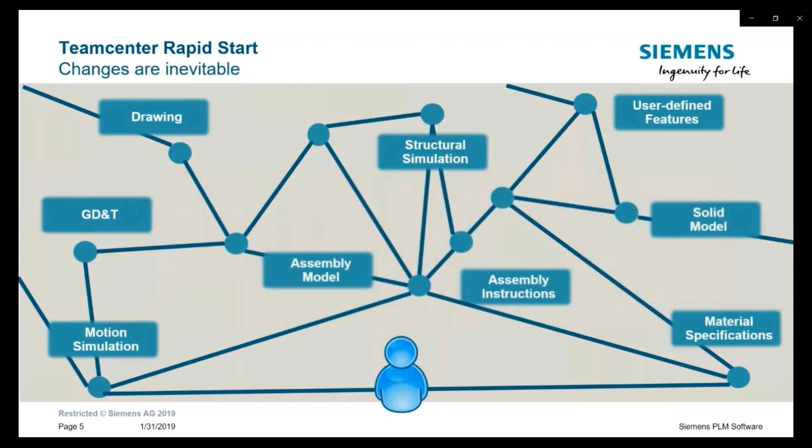Now, on top of that, change happens. The customer changes the requirements, or there's analysis that comes back and you have to change your models, but there's always change that's occurring.

Now, all of that data is interconnected, so when the change occurs, it's not good enough just to find that single piece of data that has to be changed. We really need to understand what the change will affect upstream and downstream. Otherwise, we may not see the whole picture, and making a small change can have a huge impact.

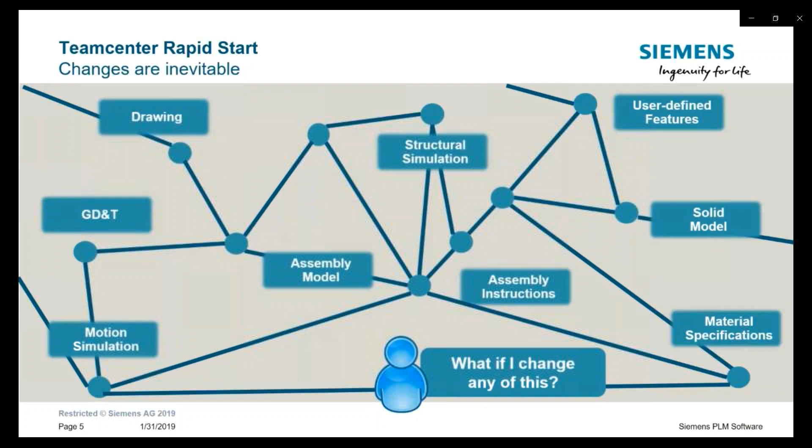That impact can cost a lot of money, and if the proper changes aren't handled efficiently or in the way that they need to be handled, it can hurt you on the bottom end. So we need to have this interconnected structure that allows us to be able to find all the affected documents. And Teamcenter manages that environment very, very well.

So by using the powerful search capabilities of Teamcenter, I can easily and quickly find my data, the exact data that I need. And I can also understand and see all the relational links of one piece of data to the other pieces. So this way I understand and have visibility to the entire breadth of data that defines my product or item.

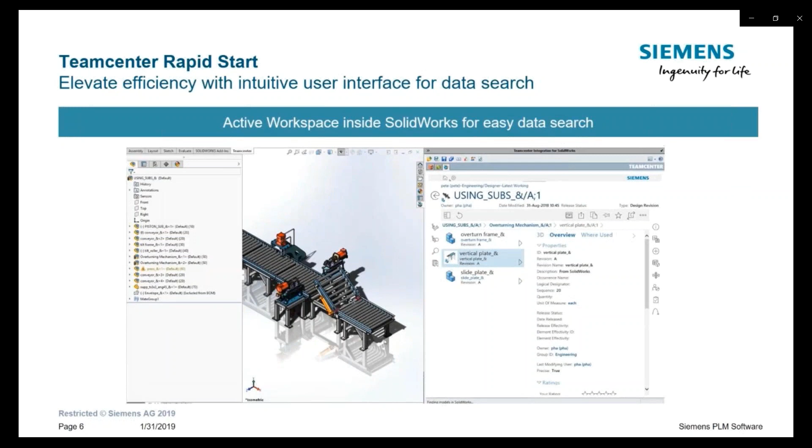In this next section, I'll discuss how you'll be able to stay in your CAD or Office tools in which you're comfortable working while still getting the benefits of Teamcenter Rapid Start. By doing this, this will result in an increase in productivity in the company by giving users direct access to the power and benefits of managed data via Teamcenter without having to switch between various software platforms.

So Teamcenter Rapid Start uses the standard Teamcenter integration for SolidWorks, which allows you to reduce product development cycle time and cost by enhancing your SolidWorks environment to deliver a single source of product data for your design and manufacturing teams. The integration provides access to a full range of PDM capabilities to help ensure that the right people get the right information at the right time.

Now, using Teamcenter Active Workspace, users can easily access PLM functions such as search and reuse, structured workflows, change management processes, design relationships, and more from within the native CAD authoring environment.

To help maximize designer productivity, the integration enables designers to create, save, search, and edit SolidWorks objects, including drawings, parts, and assemblies. Users can selectively update in-session models to later versions or revisions without reloading their entire assembly. During the design process, the Rapid Start environment tracks and manages the creation of new product revisions or versions, and updates that work in progress as well.

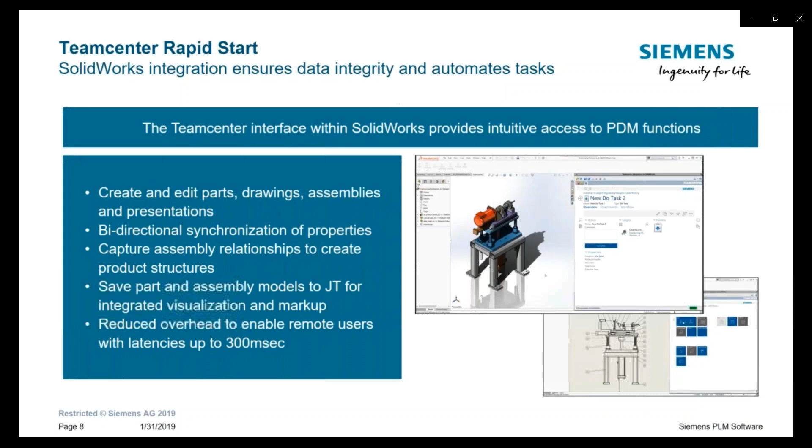In addition, Office tools are also tightly integrated with Teamcenter. There is a Teamcenter toolbar right inside of all the Office tools that is extremely intuitive, with commands like open, save, revise, and other operations.

This is the great thing about the integration: you can just open Word or Excel as you normally would, and then save to the secure Teamcenter encrypted volume instead of saving to a network or local drive, where you run the risk of losing that data the next time you go to look for it. This immediately puts your documentation into the managed environment where you can take advantage of workflows or other benefits that Teamcenter provides.

Teamcenter is tightly integrated into all the major mechanical and electrical CAD players, along with various ERP systems and other systems. Users can be comfortable in the system they are accustomed to working in and still get the benefits of Teamcenter.

This is a quote from the PLM manager at Briggs & Stratton. He basically says that Teamcenter is an advanced data management tool, much more advanced than anything SolidWorks users would be used to in that SolidWorks world. But at the same time, it's very easy to use because it's embedded right within SolidWorks, so they can get to it very easily. They stay in the tool they're familiar with, doing the SolidWorks CAD design changes they know how to do, but they get the benefit of having Teamcenter on the back end.

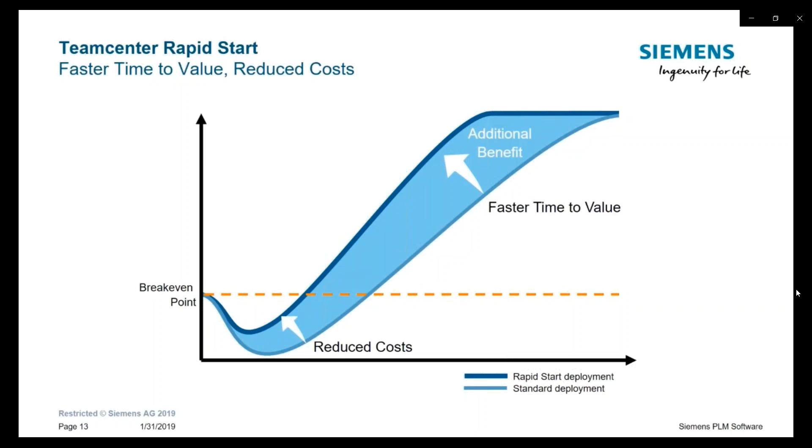The payback is based on a McKinsey report that states people basically spend about 2 hours on average a day just looking for data. That may be going out to a network drive or a local drive, trying to find that file. I think we've all experienced it: I know the file exists, but where did I put it? At the same time, within engineering groups, we typically see multiple copies of that file, maybe on the server, maybe on workstations, and then it becomes an issue of which of these is really the correct version to work with.

In this particular case, or in most Teamcenter quick deployment cases, we're looking at an implementation that is a smaller business install of Teamcenter Rapid Start. We give you lots of different options for that implementation. There are on-site and cloud-based options that change this formula, but you can rebalance that front-end cost and very quickly see what that is.

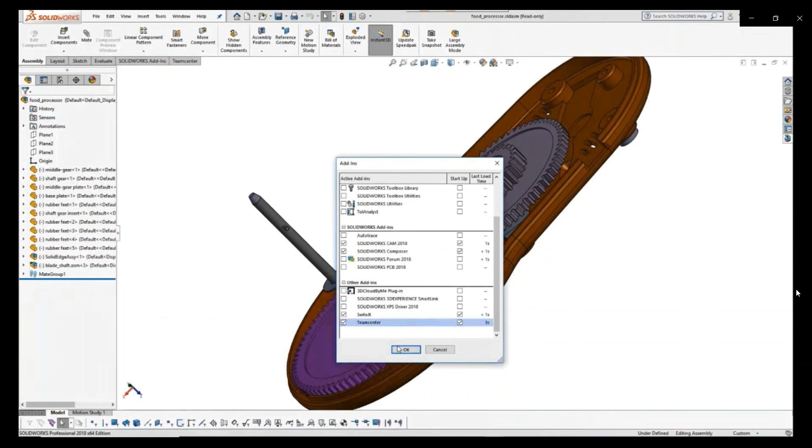Teamcenter can be installed just using the add-in tools. Once Teamcenter gets installed, you'll be presented with an icon on the right toolbar that gives you access to the active model in session. You can also look at what is in the cache and say, show me only the items in cache that are displayed on my screen. You can also see what's checked out to you as a user.

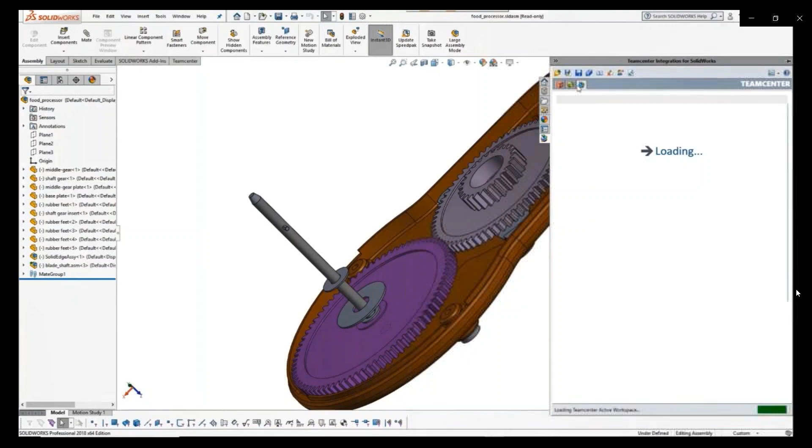From there, I can also get access into the active Workspace interface, which is embedded inside of the SolidWorks product. So I have full access to Teamcenter. I also get a pull-down menu, which gives me access to Teamcenter functionality as well.

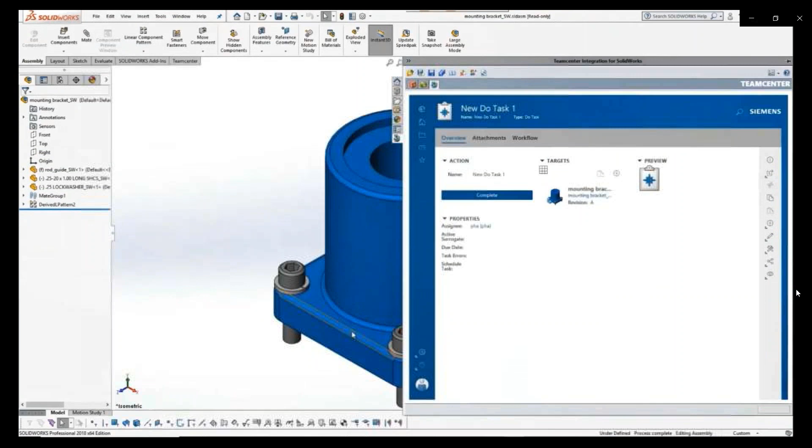Now in this example, Teamcenter can drive tasks to the user. So in this case, the user has been assigned a task. He can immediately see what that task is inside the SolidWorks product, open the affected assembly or parts or whatever needs to change, and then begin working, making the changes that have been requested of him off that task.

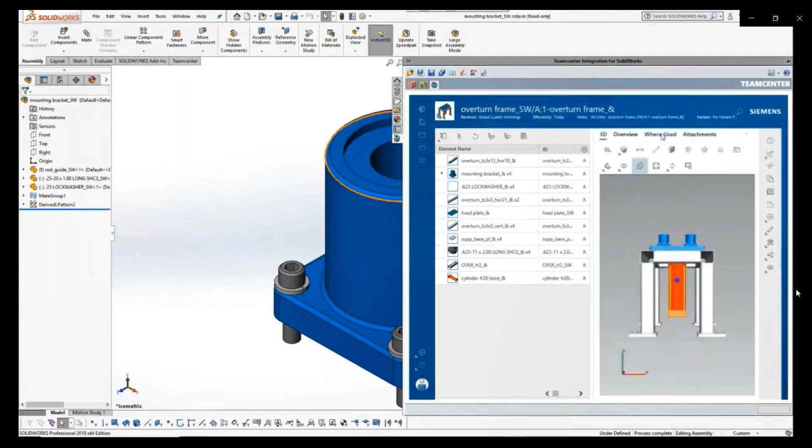Now, using the Teamcenter interface, he can also navigate the part. So he can say, show me where this part is used at, or this assembly is used at. What you see here is a graphical display. You also see the bill of material presented there on the left side. In this case, we're just navigating up the tree—where's that assembly used, where's the next assembly used—and eventually we get to the top level.

Now, from here, the designer wants to focus on that top level assembly and make his changes from there. In the background, Teamcenter is managing this the entire time. It's keeping an audit trail, and it's going to understand which parts he affects or changes.

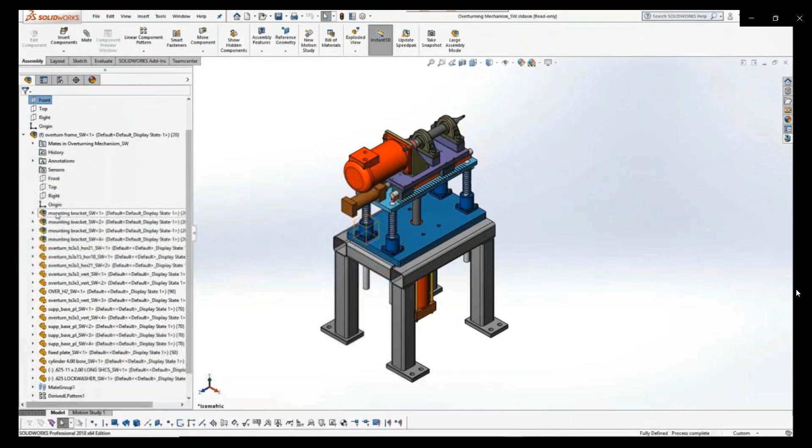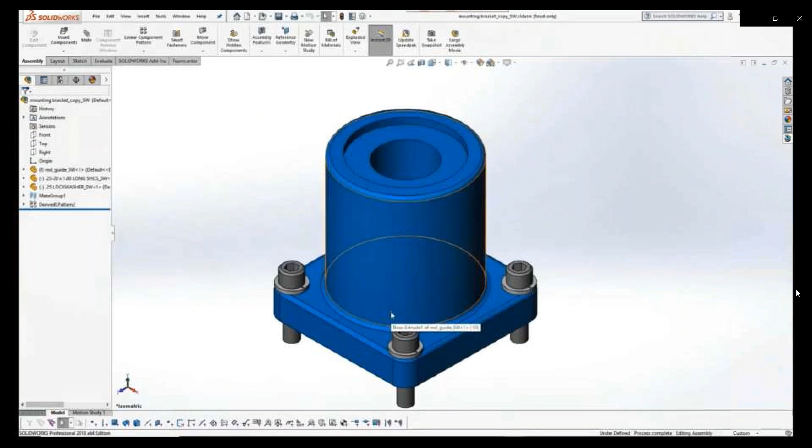So he focuses in on the subassembly using the tools that are presented. He can either save it as a new part, create a copy of it, do a revision of it, whatever he needs to do. In this case, it looks like he's going to create a copy of that subassembly and then do a replacement of the original part inside that particular environment. So now that he's focusing on the subassembly, he can begin making his design changes.

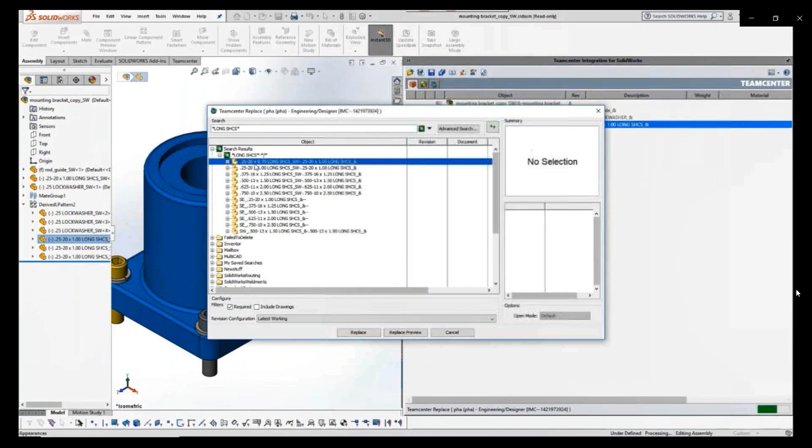Using the tools that Teamcenter provides, he can do quick searches for additional parts or data. In this case, he's looking for a different fastener to replace the fastener that exists in that particular assembly. He's actually querying the Teamcenter database and is presented with different options. You can see here that the part he's replacing out is a much shorter part.

Now, anytime he goes in there and pulls parts out, checks something, he has the option to check those parts out to keep somebody else from coming in from behind him and changing the same things that he's trying to change. So it's controlling that entire environment.

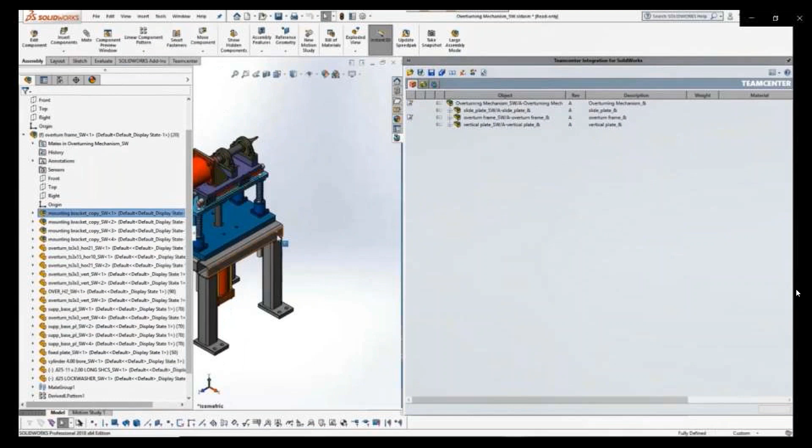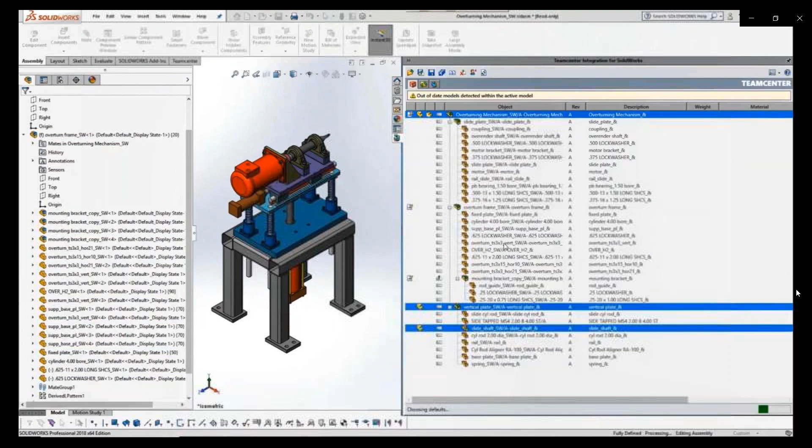So now he's going back to that full level assembly, and he's seeing the change that he made, but he may also want to look at changes that other individuals have made. You can work collaboratively in that environment based on rules that are in place. Here he can see that there are other models that Teamcenter has detected as being out of date. Keep in mind, he's still in SolidWorks, but he's working very interactively with Teamcenter.

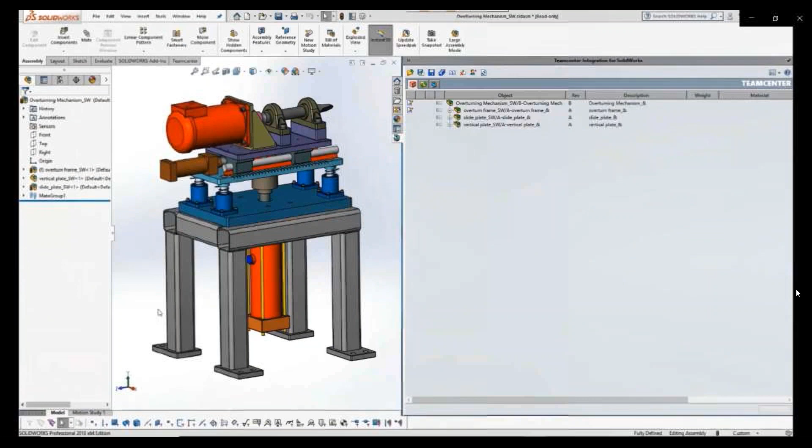Teamcenter is going to identify all the parts that have changed while he's been working in his session, and he can take those and say, let's update my session to reflect changes that occurred. So what you're going to notice is the table got shortened. Somebody shortened the table while he was working on it, but it didn't necessarily affect his part.

You also have drawings that can benefit from the Teamcenter environment. Here we're just creating a drawing as you normally would, but it's also interacting with Teamcenter, grabbing attributes, metadata, and bill of material information.

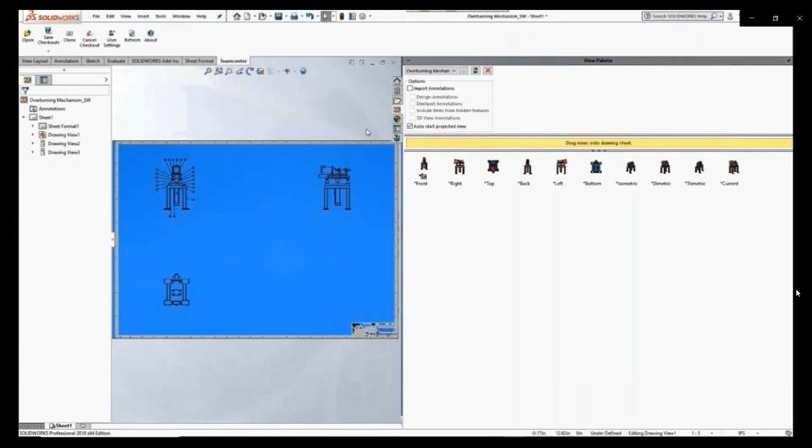So when he goes to balloon this assembly, the two systems are going to sync the item IDs. So now, even if he places a bill of material on the drawing, those item IDs will match the same item IDs that exist in Teamcenter.

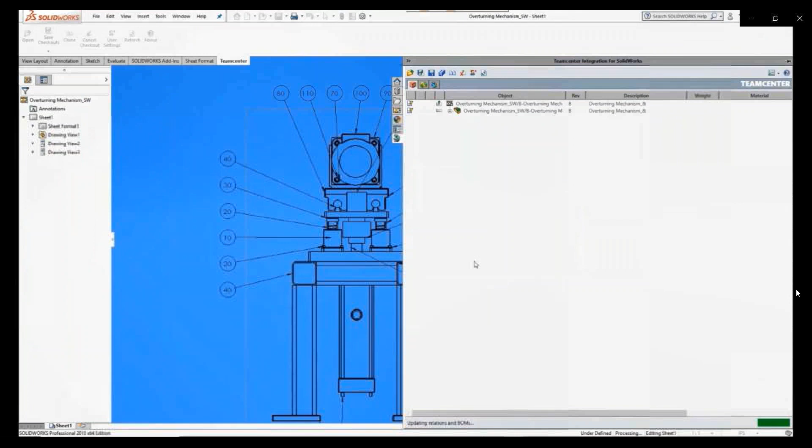Going back in, maybe he's done all the changes he needs to do, made whatever revisions are necessary. He can save everything back into Teamcenter, and it will automatically check things in. If revisions need to occur, he'll be notified, and those revisions will be taken care of automatically as well. Now, once everything gets checked back into Teamcenter, somebody else can go look at that data.

So what you see here is a Teamcenter standalone interface where somebody's bringing up the same parts and assemblies. You can see they use a powerful search tool to locate the parts very quickly.

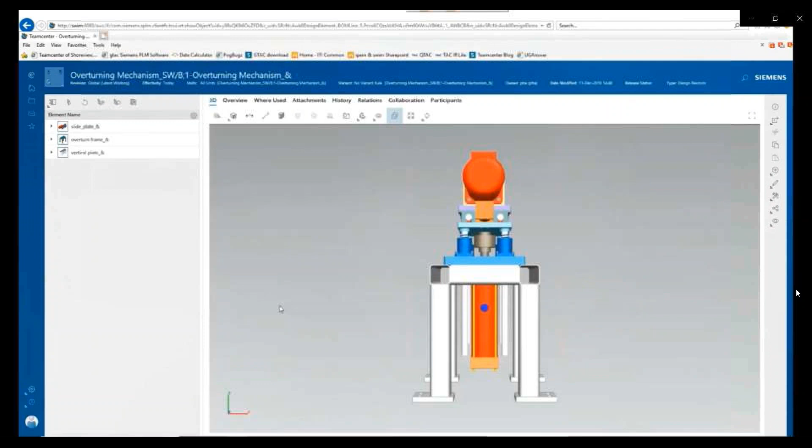From there, we can look at the various attachments. We can see there's SolidWorks data behind there, and there's a PDF. Teamcenter generated that PDF automatically for our users, so he didn't have to go out and do that as a secondary step. The visualization is built in.

This is available for all users, whether they're CAD users or not. The great thing about the visualization is that I could have somebody on the factory floor, somebody in purchasing, that can still get visibility to those models. They can interrogate the models, take measurements, and so on without having to tie up a CAD seat.

So I touched on increasing efficiency by over 20%. We typically see that with Teamcenter Rapid Start installments, and many times it's more than that. It is a very intuitive user interface. You get productivity across the organization because it's tightly integrated with your CAD products, in this case SolidWorks, or even your office applications. Because Siemens and our partners have done deployments hundreds, thousands of times, we can get it installed quickly, get you up and running quickly, and do it efficiently for you so you can get that return on investment.

So in review, I walked you through PDM. It's a quick presentation, pre-configured PDM solution, but keep in mind, it supports mechanical CAD and electrical CAD tools. It establishes a single source of product-related data, and provides a growth path from PDM to PLM if you ever need to move that direction. It deploys quickly and cost-effectively for your fast return on investment, and again, it requires a minimal IT staff to support it.

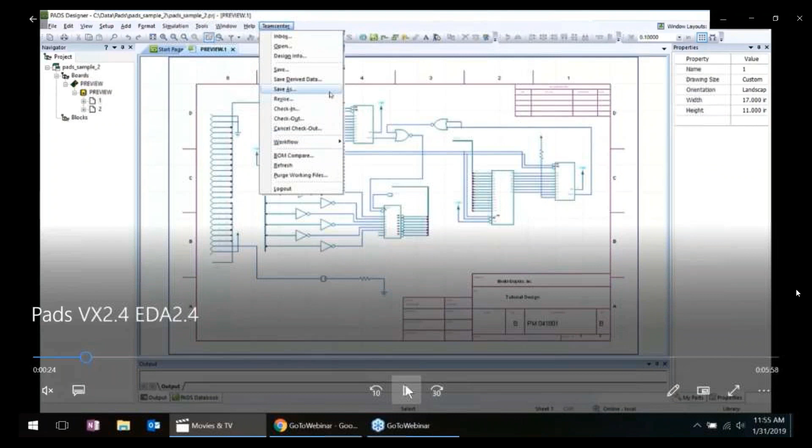revise them, initiate workflows, and receive workflows, do BOM compares, those kind of standard things that you do on a daily basis for a designer, are available through the Teamcenter menu that's embedded in PADS. So either PADS Designer, or if you're using PADS Logic, same menu, and also PADS Layout for the PCB side.

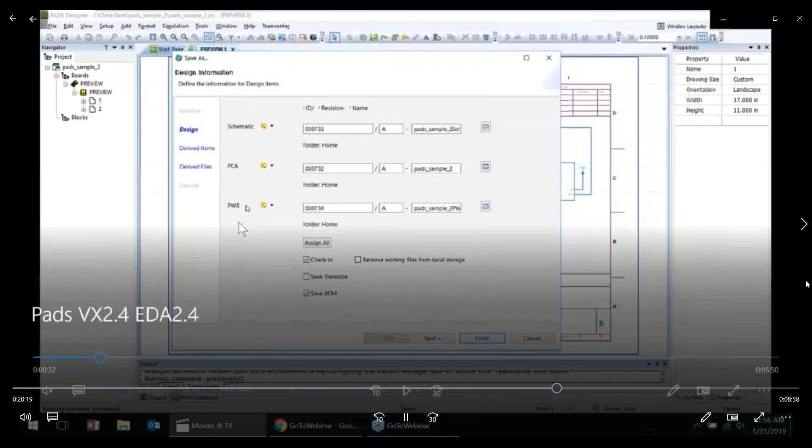So to start with, we'll go ahead and do a save as, save this design into Teamcenter. You can see we pulled 3 part numbers for the design: the assembly, the schematic, and the bare board, so that we can have the bare board represented in the bill of material.

See, the integration has already pulled the next 3 available part numbers from our Teamcenter system, so whatever numbering scheme you have in Teamcenter for this, roll this forward a little bit, as well as initial names. And we can change the names here to protect the innocent to what we want. Then we can decide whether we want to check the design in or not.

Are we done working on it? Do we want visualization files? We'll talk about that in a little bit. And do we want the bill of material? Now, at this point, you can finish, and it will save the design to Teamcenter.

It will create these 3 part numbers and upload the project to Teamcenter, create the bill of material. But there is a common configuration that most every customer does, and it's called derived items and derived files. So I have a sample configuration in my system, and I'll go ahead and show that.

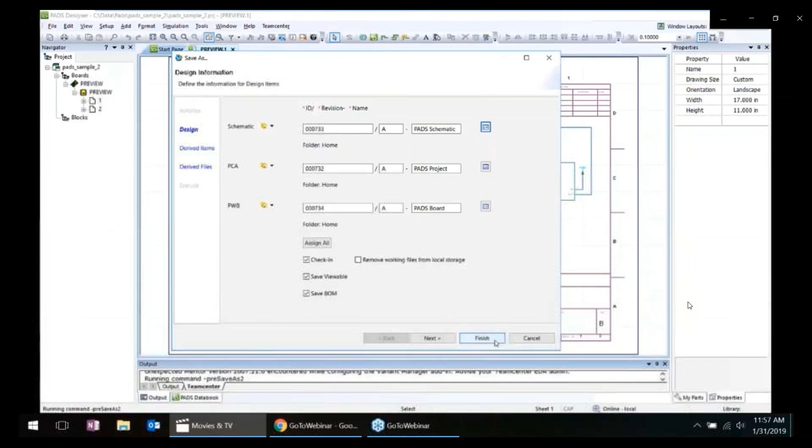The first extra screen that we'll get to is derived items. So like I said, we create 3 part numbers in Teamcenter for the design. Some companies need additional part numbers for their design, so we give you the capability of defining extra part numbers for the design. So I have a sample here with an extra item to create the drawing itself—it could be a separately revisable drawing—and an item to contain my manufacturing stuff, the stuff that I'm sharing with my board supplier, let's say.

But this is a completely configurable list. It's different for every customer, and if you don't need extra items in your structure, then you won't see the screen. And then we can change the ID and names for those as we do.

The second part of derived data is the actual derived data. So this would be things like output data, like your ODB++ files, your Gerber files, maybe a PDF of the schematic, those type of things.

We can save these to their own separate data containers anywhere in the project structure that you want. And this makes it easier for downstream users to get to this data, and makes it more accessible to the rest of the company. And again, this is a completely configurable list. Yours probably will look similar since these are kind of normal type output files, but you configure it the way you want. So we'll go ahead and run this forward.

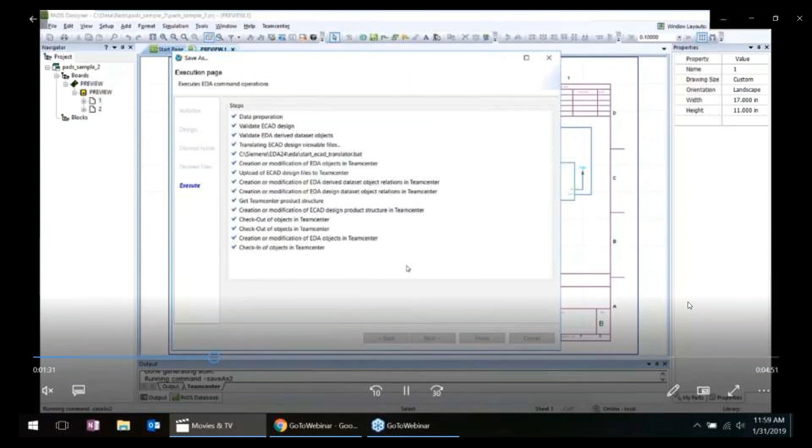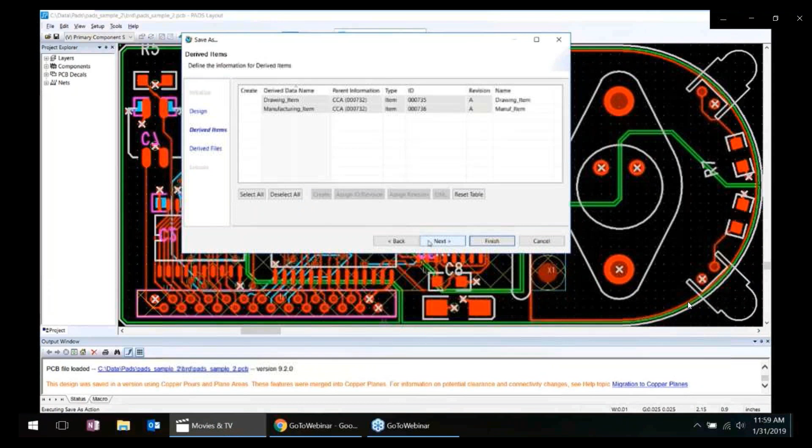We'll do the save through the magic of AVI. The save happens immediately. And like I said, if you're in PCB Layout, you get the PADS Layout, you get the same menu. I'm just going to save the layout side here. You can see that it already has the same part number as the project from before. And I get the same options to have derived items and files on the layout side.

So let's go look in Teamcenter at what we created. I just go over to Teamcenter and do a quick search. I believe I named these starting with 'pads' something. And here we can see the project, the schematic, and the board part number as created.

If I open up the project, you can see the bill of materials with all the part numbers, as well as the reference designators for this design. So all the symbols that were populated in that schematic layout when we saved it are referenced in the bill of material, along with their information that Teamcenter knows about those components, as well as the reference designators from this design.

You can see I'm in a packed view for my bill of material. In other words, the first capacitor in the list, I've got 7, 8 of those capacitors. You can see how it lists those in there.

In addition to the bill of material, let's look at the structure that got created. So I'll just go into our relations area and show the project. As a child of the project, we'll see a separate part number for the schematic itself, as well as a part number for the bare board down at the bottom, so that we can represent the board itself in the structure. And then since we configured derived items, you can see my extra items I created to derive the drawing and the manufacturing item.

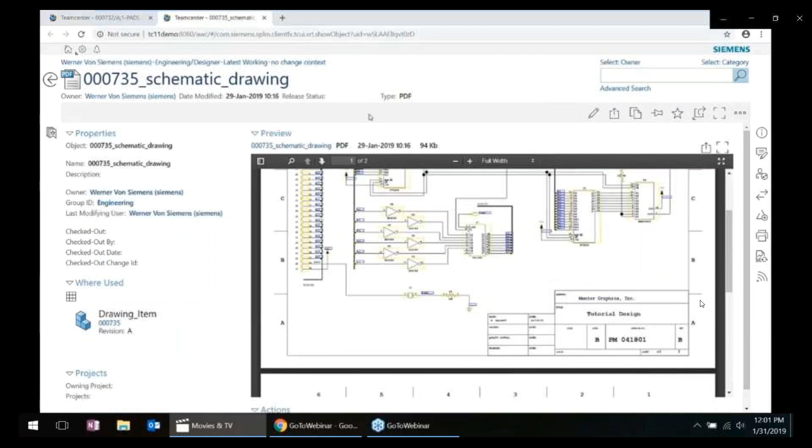And if I want to look at any of them, I can say I want to look at the schematic drawing, and it'll open that up in the visualization here so that I can see it. And if I want to look at, let's say, the manufacturing drawing, I can do the same thing.

I'll look at the manufacturing drawing, see everybody's on mute so I can't hear them, or nobody actually laughs at my jokes anyway. But let me back that up 10 seconds here.

We're going to do an open now. So I saved this design and showed the structure within Teamcenter that it created. What I want to do is show a little bit more of the functionality from the PADS side. You'll notice I also have icons in my menu bars for Teamcenter functions, so I'm going to open a design from Teamcenter and load it into pads.

I'll click that, and you can see the dialog is the same dialog that I had when I was in PADS when I went to Teamcenter. So I'm using the Teamcenter Active Workspace client, and I just tell it that I want to open the pads design for modifications, and it loads it into pads.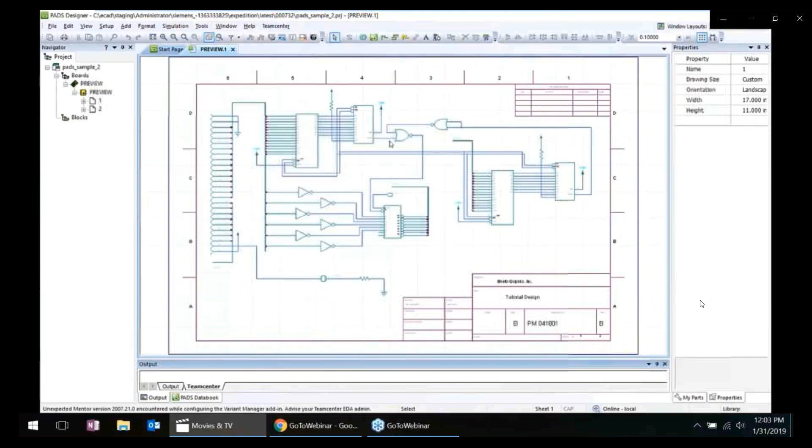Then I can submit it to a workflow, let's say a design approval workflow. All of these functions are available to me directly from pads. I don't have to keep hopping around between different systems, so you can keep your designer in your CAD tool.

Here I'm just attaching the design as a target of this workflow. I also have the option of attaching reference items, either from Teamcenter or from my operating system if I had additional data that I wanted to attach to this workflow. And the workflow gets submitted.

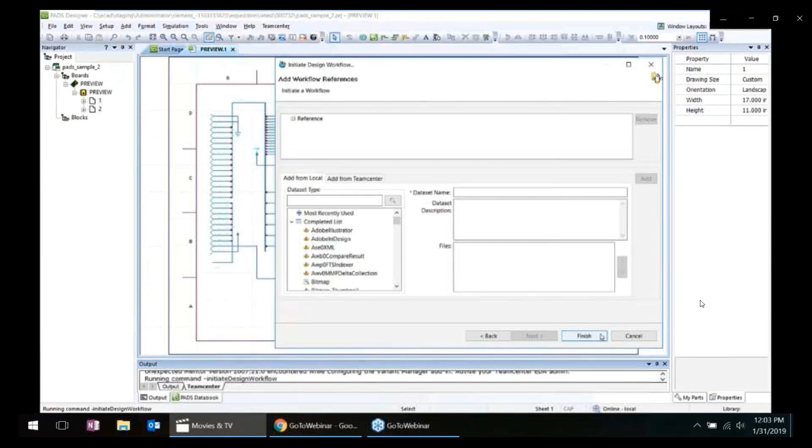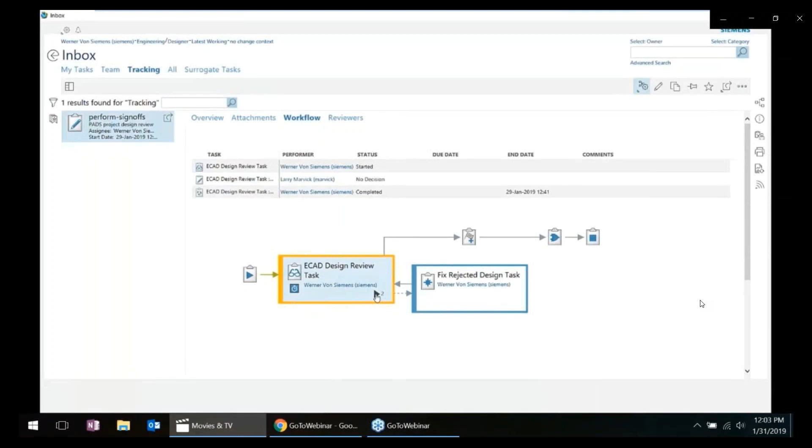After the workflow is submitted, directly from pads, I can go to my inbox and check the workflow, and see that it's sitting in my design review task, and it's on Larry Marvick's desk, waiting for their review. And then the last thing I wanted to show is the visualization, because I talked about saving the visualization files.

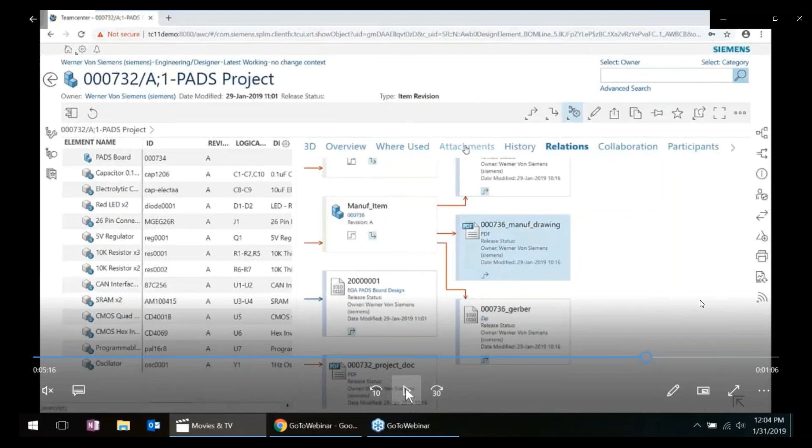So I hopped back over to my Teamcenter client, to my Teamcenter web client here, and I'm going to go and look at the output from the PCB layout. This is a visualization file that got created when I saved the PCB layout.

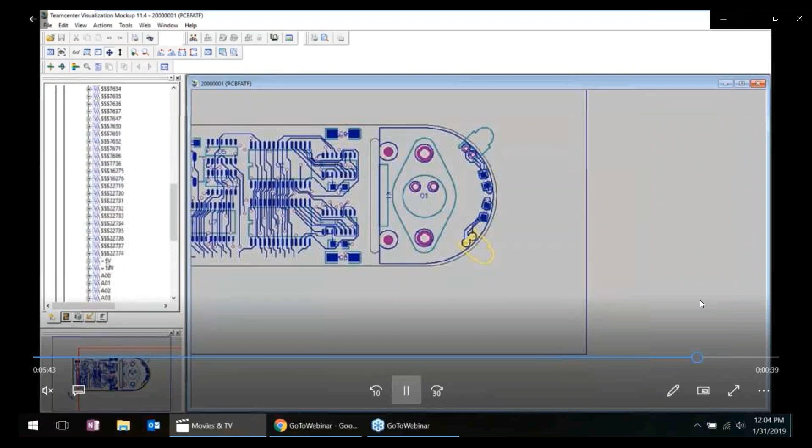So this is a way for me to look at the design from a Teamcenter system without needing pads. This is a visualization - you can see I'm looking for components, I'm looking for net for this design, so I can interrogate this design.

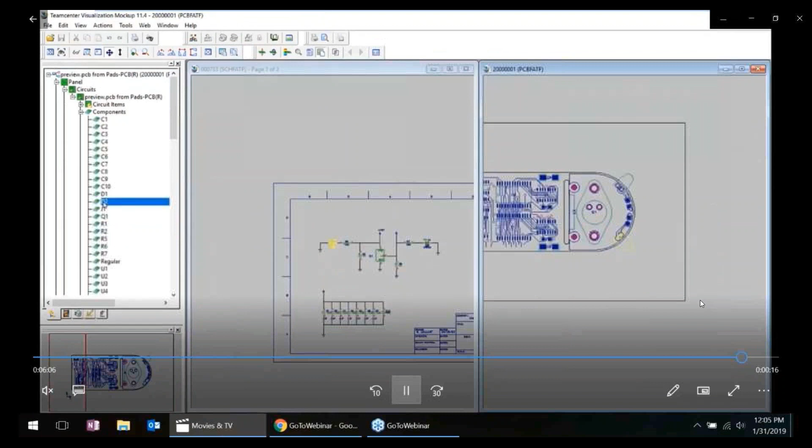Now let's go get the schematic layout and open it up in visualization here, and I can cross-probe between the two of them. So I've got the schematic and the PCB open, so if I find R2, it finds it in both sides, both schematic and layout. And of course, if you search for R2, you can search for D2, right?

We also have markup and interrogation capabilities, so I can apply some dimensions, put some text in, whatever I need to document a design review for it. And that's what I wanted to show to you today.

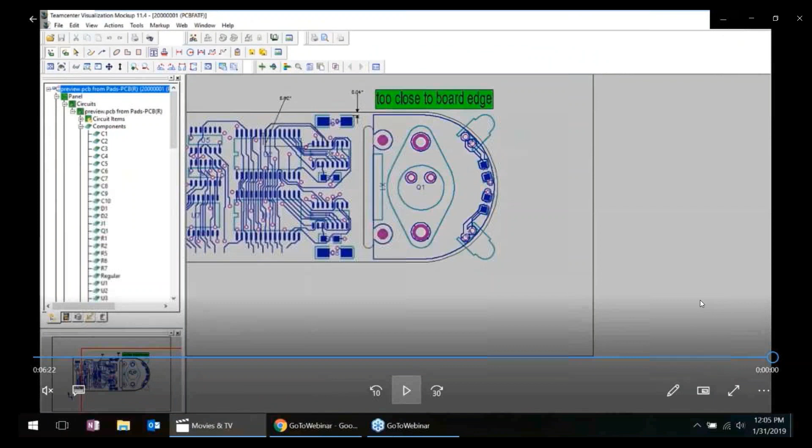All right, so let's get back into this.

So with Teamcenter Rapid Start, engineers can quickly and easily find what they need, and then they'll know what to do with it once they do.

Transparent PDM enables user-friendly documentation management, and their products and their corresponding documentation are managed together so that all documentation that defines a part or assembly is aligned with the product itself. This provides the user with clear visibility to the information driving a product's development.

Flexible change management with clear impact analysis and change tracking help you implement change quickly, accurately, and effectively.

And so in review, we've walked you through what Teamcenter Rapid Start can offer you as a pre-configured PDM solution that supports multiple mechanical CAD and electronic CAD tools, establishes a single source of the product-related data, and provides a growth path from PDM to PLM. It deploys quickly, cost-effectively for a fast return, and it requires minimal IT support.

So we've also shown you how Teamcenter Rapid Start can achieve this with both PADS and SolidWorks.